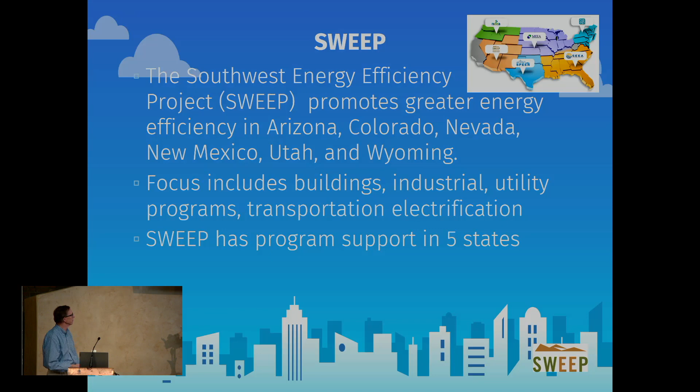So those are the codes. What's interesting now is the NEC. I never had any discussions about the NEC all the years that I was working on codes, until the last few years, because of all this discussion about decarbonization and electrification. Never had a discussion about the NEC—wasn't brought up in any of these conversations.

But now it's there because we're looking at the panel capacity loads, the electrical loads. We're looking at the NEC as—how archaic is the NEC? Does it recognize that we have all these LEDs and all these efficient appliances and so forth? So that's part of the conversation now. I know the front cover, that's about it, and I know a little bit about some panels. But that's now in the conversation about codes, and it wasn't before, other than with the electricians.

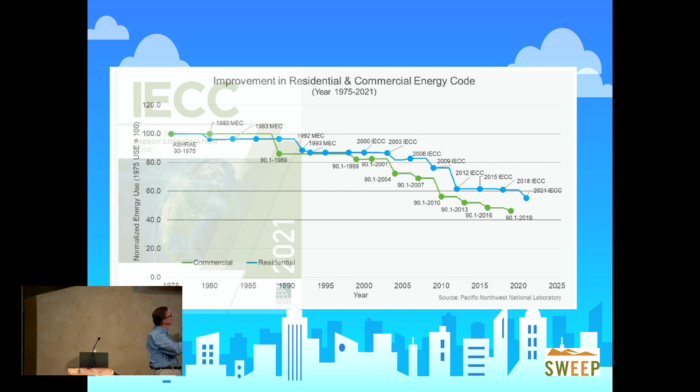So you can see green is commercial, that's ASHRAE, and blue is residential, the IECC, International Energy Conservation Code. We got stuck from the 2012 to the 2018, and now we saw about a 10% increase to the 2021. I'm really going to focus on residential.

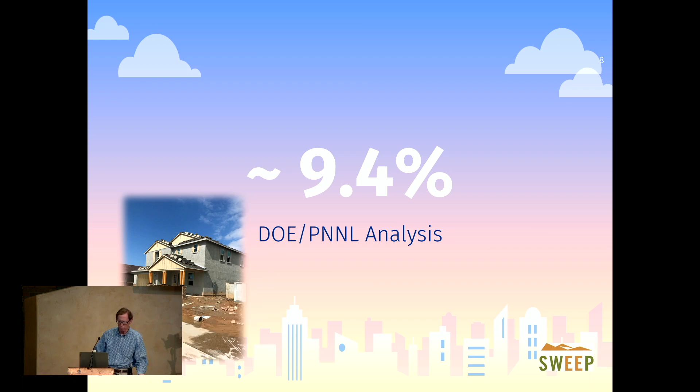There's not enough time to go into all the different commercial building types, and that conversation would be around the ASHRAE standard. I used to participate in the ASHRAE 90.1 committees years ago when I was working for an insulation trade association—so that was 13, 14 years ago.

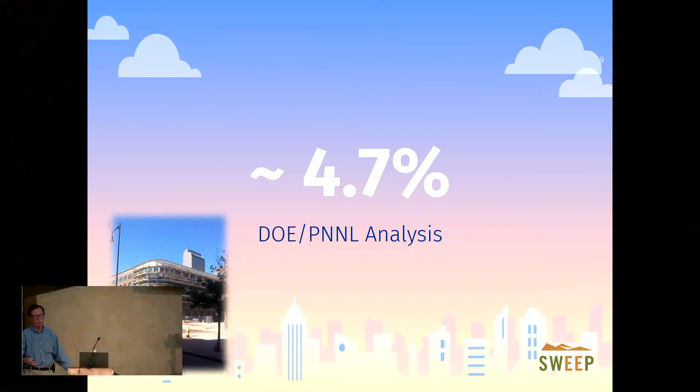9.4% savings with Department of Energy analysis for residential, commercial it's 4.7%, and this is from last year. There's a statutory requirement that they have to assess every time a code comes out—ASHRAE for commercial and the IECC for residential—whether there's energy savings from year to year. That came about from the 70s, when we had that big oil embargo and all the energy crisis and so forth of those days.

So complexity—this is the 2006, and I worked on the development of that. Look at how thick that is. Not very thick, and that's residential and commercial. This is residential and commercial today. The majority is commercial.

Residential is about that amount. Commercial is this. Much more complex, much more pathways for a designer, a builder, trades to build to the codes and standards, but much more complex areas that are in the code. Commissioning is in commercial codes. It wasn't in 2006. It wasn't there in 2003.

But if we're going to get to that corner of the graph, we're going to have to add some more complexity. Years ago, a fellow at the Pacific Northwest National Lab, Dave, said, let's just simplify everything and just come up with a number, MMBTU per square foot or kilowatt hours per square foot or something like that. I like that idea. Then we'd have guides like this thick on how to get there. But that would definitely simplify the code. Just have a number, and then you'd have to use software.

So I think we're still probably not till the 2030 timeframe when we'll start to see prescriptive move out of the code. But that's still there in California too. So codes and standards have been around for a long time. You've heard about King Hammurabi in Babylon, and he had his, if a builder builds and it falls and kills the owner, then they're put to death.

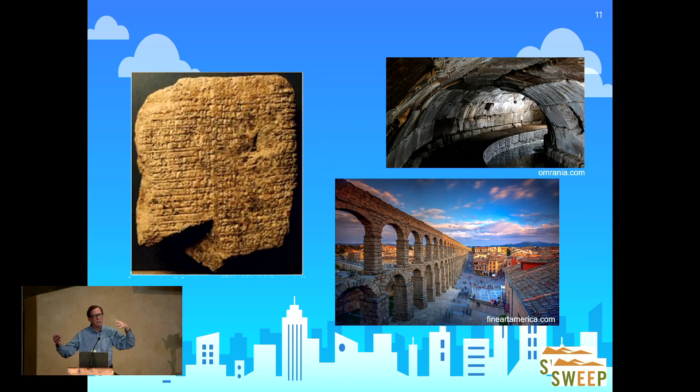And then, of course, in Rome, they had all kinds of requirements around their water requirements. And they also had requirements on their buildings so that they wouldn't tumble over. So they started at 70 feet, they moved them down to 60 feet. They weren't into the energy efficiency that we're talking tonight, but codes and standards of some level have been around for a long time. And of course, the Chicago fire and San Francisco and on and on. And the insurance industry saw the value of codes and standards too.

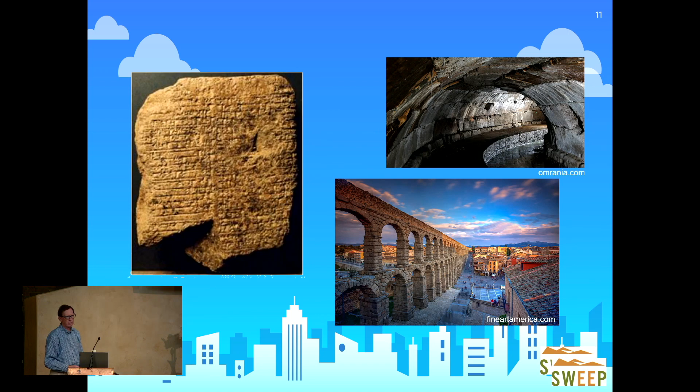So I tend to call it progress, not perfection. The code is not perfect by any means. It's developed by humans, and it's developed by building officials and product manufacturers and efficiency advocates, a whole different mix. And so we're progressing to that goal, but it is not a perfect code. And so that's why the codes are developed as model codes so that you can amend them at a state level or at a municipal level.

And so I'm going to show you some of the things that are in the code today, the newest code, the 2021, and how that brings comfort and building science. So some of the complexity we talked about here, it's because there's been so much that we've learned about how buildings operate, how they perform. And that is filtering into the building codes, and it's filtering into the energy code.

There's pushback. There's certain industry that doesn't want it. They'd like to continue to build from the 2006 code if they could. But they're also recognizing that things are changing before them, especially around electrification, especially around EVs and so forth, that they are becoming more open to some of the policies. I'm not calling out names right now.

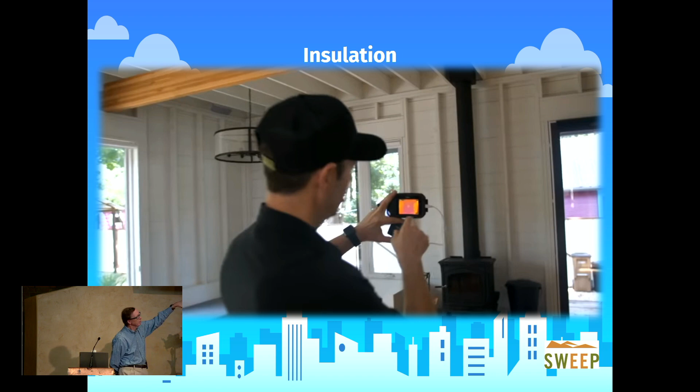So what do you see here in this wall? This is a wall. This is a house. It's in the northeast. It meets the code. What's going on? And that's a finished wall. What do you see? No, it's not. You can't see it. It looks almost like ship lap right up there. So what's happening? That's a code-built house in a cold climate. He is, but what's in the wall assembly? How do you think that wall is built?

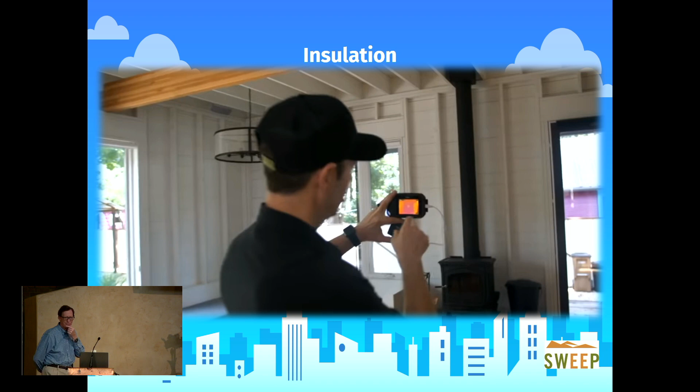Okay. It has insulation on the exterior. It's not SIPs, but it's insulation. Yeah, it's insulation on the outside because of the value of removing that thermal break in the wood. And so that's in the code today. Wasn't in the code years ago, but it's in the code, recognizing from a building science perspective that if you eliminate that thermal break, that building enclosure, that building shell is going to perform better. It's going to bring more comfort. And yes, so he's doing an IR scan on that house, showing that it looks good, but from the inside it doesn't, because all the insulation's to the outside.

So this is a table that gets caught up at municipalities, gets caught up at states for development. And I apologize, this was taken right out of the code, and you can view these codes for free on the ICC website.

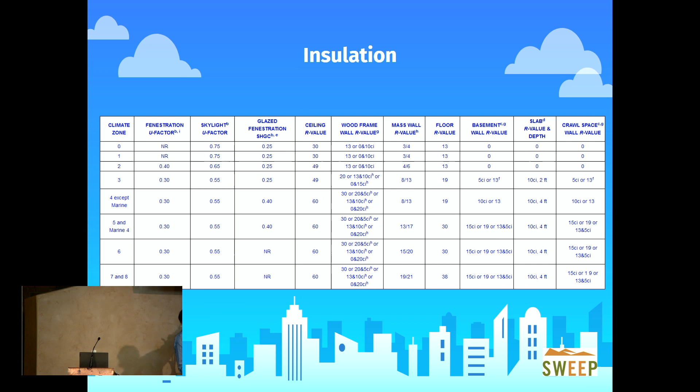And so here's where you see there's a 30 on the inside. At the very bottom, it's a 20 in the cavity, excuse me, 20 and then 5 continuous on the outside, or 13 in the cavity and 10, or nothing in the cavity and all the insulation of R20 is on the outside. So that's what it shows in this prescriptive table.

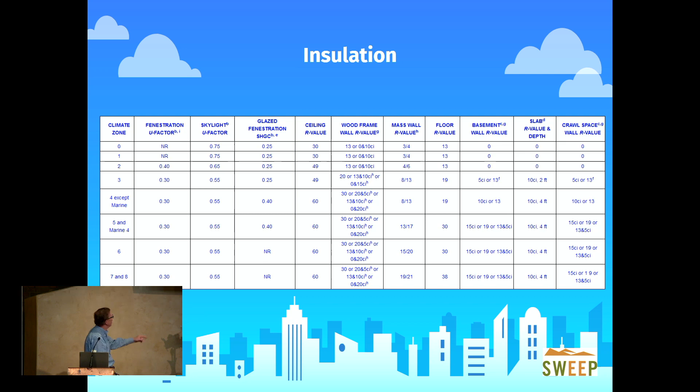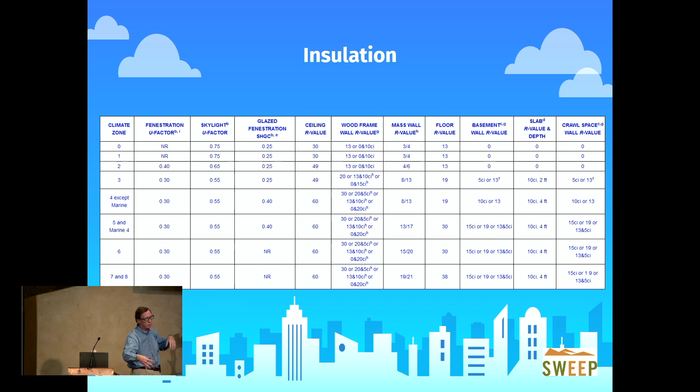And so you can see also that things have gotten much more insulation, not to passive house standards, but they're getting closer. You've got R60s in the attic in our climate, prescriptively, and I'll explain that performance. That's our baseline. And then even down in Phoenix, it's an R49 in the attic. And then the windows, fenestration is improving. I think they could drop them more, and we'll see them drop more in the 2024.

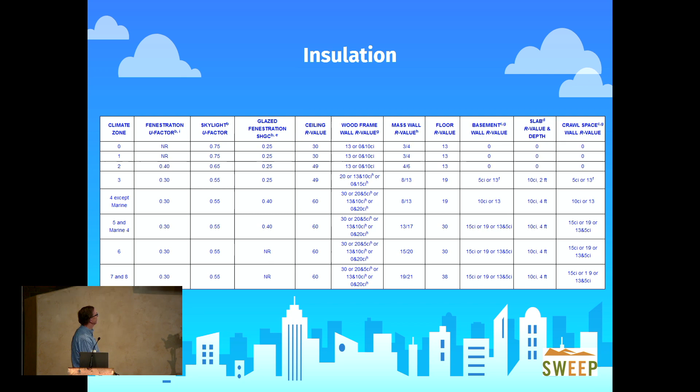And then especially the solar heat gain coefficient, they can go even further on that in the hot climates, Phoenix, Tucson, Las Vegas, those areas. And so we've improved the fenestration recently to a 0.3, so you're basically in an R3 window. Still, you can have better windows than that, but it is improving, and it's progress. It's not perfection.

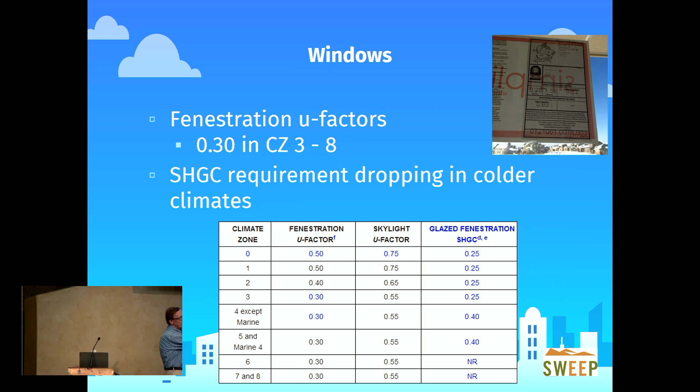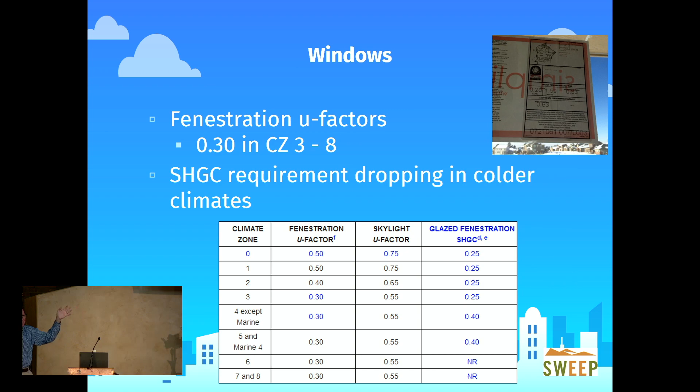So it is hard to see this picture. I took this about 9 years ago in a production house in Castle Rock. And the U factor is 0.28 in a production house about 9 years ago. And then the solar heat gain is 0.33. So these windows have been around for a long time. And production builders won't put in the most expensive windows. They want to get the best value for the product that they produce.

So the example of the NFRC, that's a good value. And again, we saw it years ago. The limitations that we have in our climate with a double pane, two panes of glass, is manufacturing here, and they use different types of gas within that window assembly, that IGU, and so most manufacturers are manufacturing outside of Colorado, and they have to bring them in. And so when you're coming in from a lower elevation to a higher elevation, it becomes a challenge.

So going to a triple pane can get us there. They're much heavier if it's all glass. They've got lightweight triple panes. They have R5 windows that have been around since the American Recovery and Reinvestment Act that was signed into law when President Obama was in back in 2010. That funded development for R5 windows, and there were manufacturers that were developing those products at that time. So we can continue to drive down the windows, and the cost really is no different.

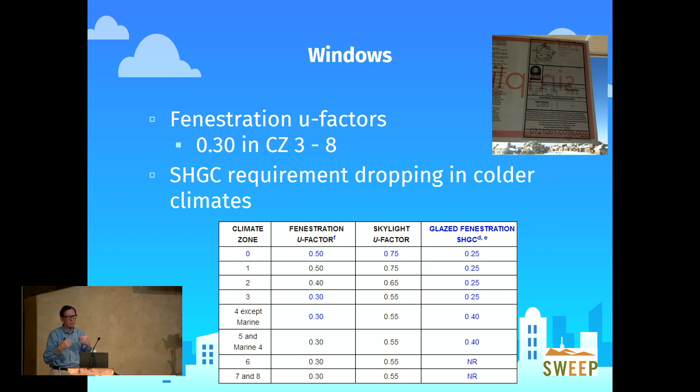Right, exactly. So years ago, you'd see more of a tinted window with these more efficient windows, but now the VT has gone up. So there's more light coming in, even though the solar heat gain coefficient may be low. And that's just those engineers and scientists that are working in that space, developing low E applications on glass. It's pretty cool what they're doing.

So for windows, here's where I was talking about recognizing, we didn't do that a few years back, the challenges of bringing in efficient windows into higher elevations. So now we do; there's some limitations. It's not as efficient, but there's known limitations until the industry can catch up and start producing those products that can keep the solar heat gain and the U factor down, and ship them into a higher elevation.

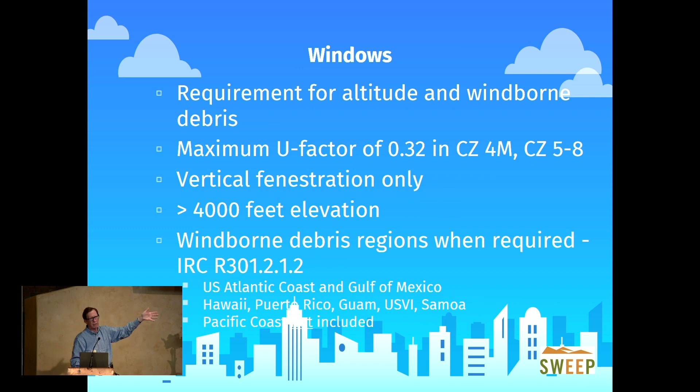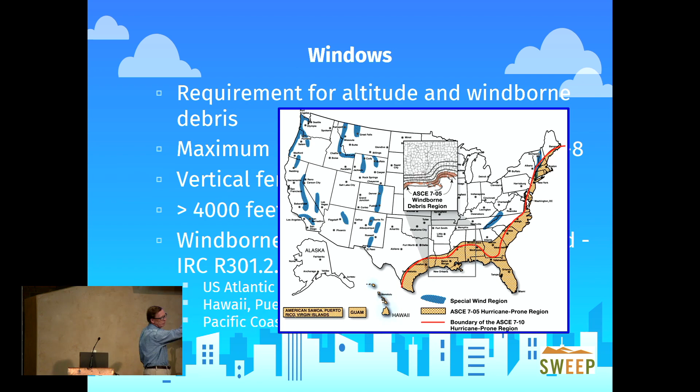And then also, there's this piece about windborne debris, recognizing that you go here along the southeast, the Gulf area, where you have hurricanes and sustained winds and so forth, that there's a different type of window application that can be applied in those spaces, and the window won't be as efficient in those areas because of that wind. And we have actually a little bit along our front range, some wind, but not to the level that's down in the hurricane-prone regions.

So this is one table that came into the code the year after this one. It came into the cycle after this one, 2009. You heard of the Energy Star thermal bypass checklist? That's basically what we've got here. And we go back and forth. In fact, we were probably 2 hours on this table today talking for the 2024 code. Where is it too much of a guide? Should it be more of a code?

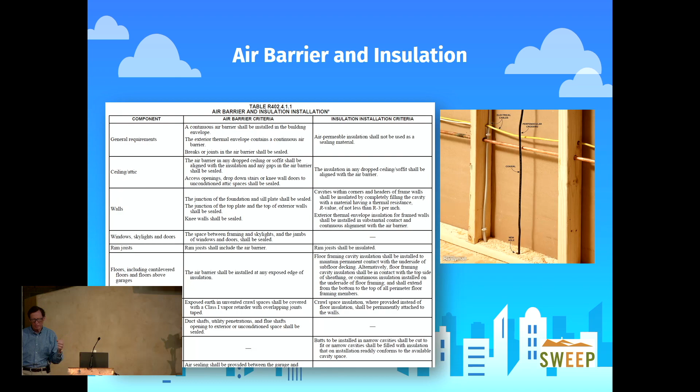But that was the whole idea here, is that we took the basics of the thermal bypass checklist and moved it into the code. Again, building science coming into the code, so that we're not building these buildings and then having issues with mold, well, mostly mold, or any other resiliency impacts to the longevity of that building.

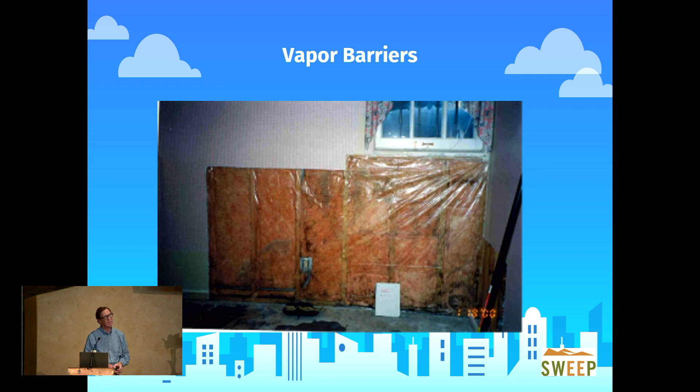And years ago, homes that were built in the 70s with no insulation, the wall assemblies could dry out. There was no insulation there. And now we're putting insulation in there. And now we're putting OSB, not plywood. And we're doing a number of other things; we didn't build houses that way in the 1970s or 60s. And so as the building materials have changed, the building science has changed too.

And as we're filling those cavities with insulation and air can't move through and can't dry as easily, vapor retarders, vapor barriers, depending upon your location, depending upon your climate zone, is it dry, is it humid, is it moist, will tell you where you should put your vapor retarder and what you could use. In our climate, we can get away with latex paint as a vapor retarder. So leakage is a big one.

And we have recognized that the code really just focused on single family. It didn't have a good take on multifamily or attached units. So you've got those common walls there that are not sealed up. Some are a wall assembly, a UL assembly. And so there's limitations on what you can do in those attached units, depending upon the materials you're using.

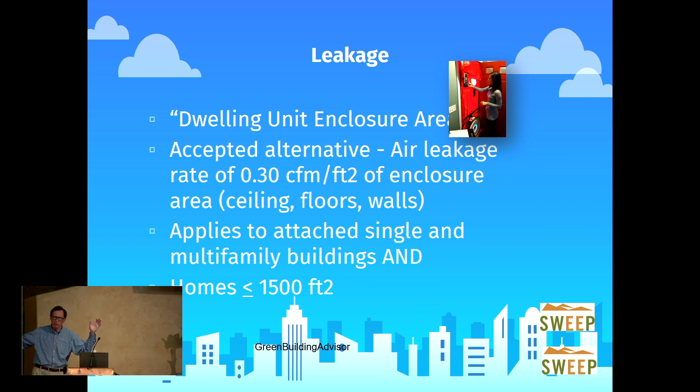And so now the code's come in: okay, if you've got an attached unit, if you have a smaller single family, 1,500 square feet or less, then you can test with the CFM, which is more accurate in the smaller units. You can't test that in the larger, though. The code doesn't allow you to do that. I see one day where it'll move to CFM. I mean, that's what you look at in weatherization. You're looking at your CFM. So all these buildings now can be tested and use that CFM calculation instead.

It's fairly close. That's a good question. So they had to look at it. It's not equal. It's somewhat equivalent. That would be, from what I understand, higher than 3 ACH. It is higher than 3 ACH, but it's not 5 ACH. It is higher, but it's close.

And the one thing about our codes is there's different pathways. You could build by a table, where you follow everything that's in the table. R this, R that, U that, SHGC this. And then there's pathways where you're going to use a service like an energy rater. And you're going to use software to calculate the energy of the reference house or the reference building per the code, and then how it's designed and expected to be built. And so those are other ways that take into consideration some other opportunities that you don't get prescriptively.

And then this is beneficial again. 3 stories or less, I'm talking residential. 4 stories would be a commercial building. But this example right here is 3, and right along the side, I took that picture, there was a 4-story. And so that's residential and that's commercial. They probably, when they submitted their plans, submitted it all commercial, is my guess.

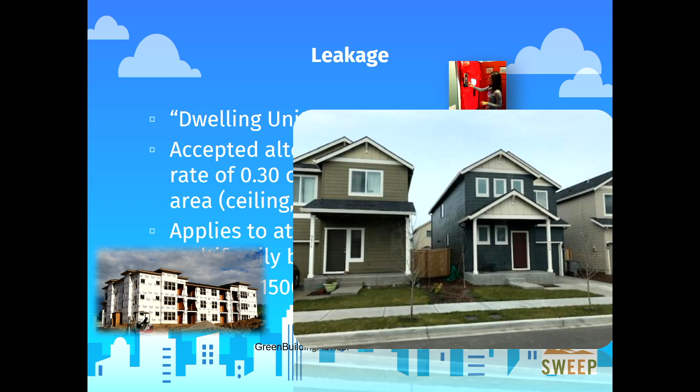Right. Good question. Okay. Good question at the end. But they're filtering into the code today.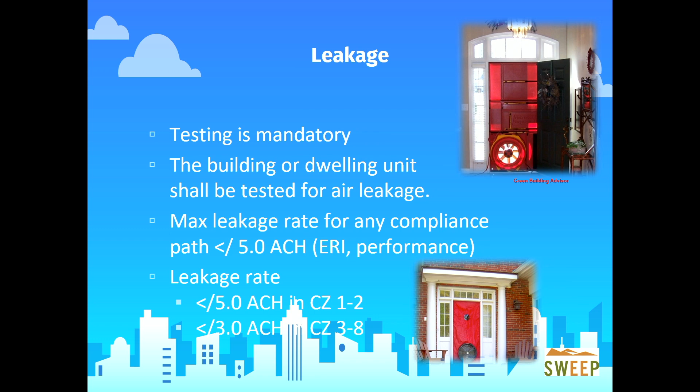Testing's mandatory, and per dwelling unit there's different requirements. If you choose a different pathway, there's a limitation. You used to be able to trade off to any leakage rate, but now you can only trade off to a certain level. You can't have it leakier than these levels. That's a new improvement in the building codes, and it's going to continue to bring comfort to the occupants of those buildings where they're not excessively leaky.

So duct testing, we've had duct testing in the code for many years. It started out just as prescriptive. The building inspector could visually look at the duct and say it was okay. Then it shifted to, if it's inside the building's conditioned space, you don't have to test it; if it's outside, you have to test it. And now, wherever it is, you have to test it—inside conditioned space or outside conditioned space. So recognizing that you still want the cool air or warm air to move and not have excessive leakage wherever that is, in a crawl space, in an attic, or whatever it may be.

Did you have a question? Okay, that's right, I'm not supposed to answer any questions. Sorry about that.

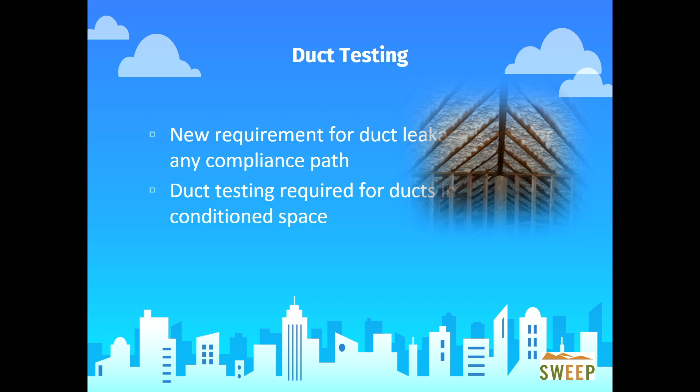So that's a new one. And we see in some of the climate areas that I work in, the ducts all reside in the attic. Arizona, they build on slabs. There's no place to put the ducts, no basement, so the ducts all go into the attic. Las Vegas, all the ducts go into the attic.

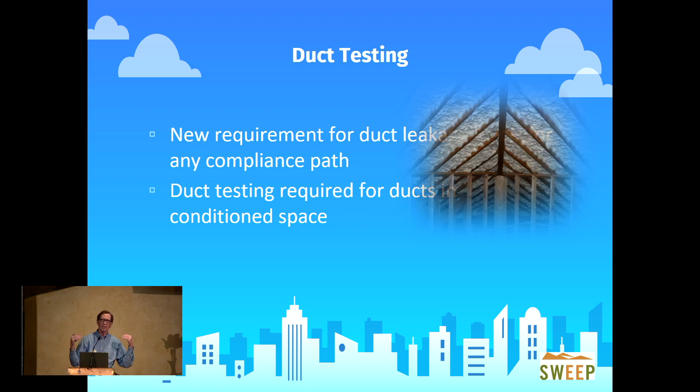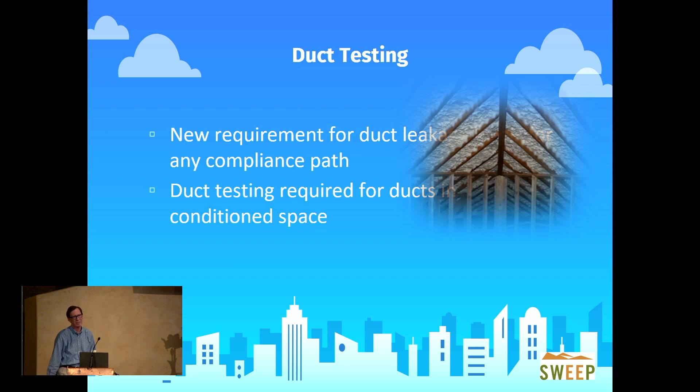So they've been taking their insulation and moving it up to the roof deck to create a semi-conditioned area, because as a semi-conditioned area, it qualified that it didn't have to be tested. Anything within did. But there, they stuck the HVAC equipment up there and the ducts up there, so they didn't have to test. Well, now they're having to test, which is good—you don't want a leaky system that you've not tested.

So duct insulation—I'm looking at my time, doing good—duct insulation in floor cavities, that's been an area where there's been complaints of comfort, where a living space over a garage has been very uncomfortable. Hot or cold depending on the time of year, and the garage was hot or cold, and the upstairs was the opposite. So what's happening now in this new code is, if you're going to put ducts in those floor areas or the garage, you're going to have to separate from the unconditioned space to the bottom of that duct an R19.

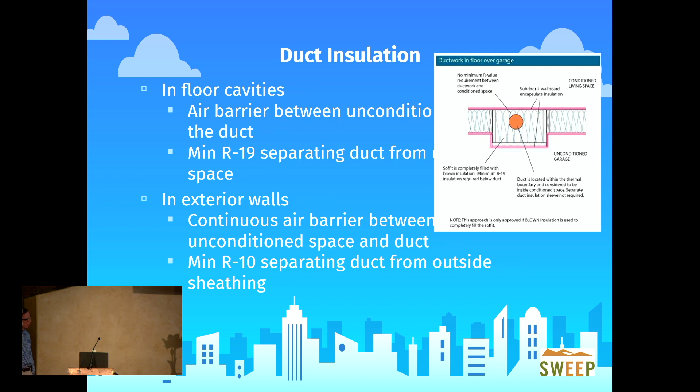In the floor, there's a diagram of it, showing how they fur it down. Back in, I don't remember, it was 2006, 2005, when I was an energy rater and the director at E-Star Colorado, builders were framing it down then. So there were some builders already framing it down, recognizing that the duct wasn't sufficiently insulated. But for the most part, builders just throw it up there and fill it with insulation, but there's a minimum amount of insulation depending on how close it is to the drywall in the garage.

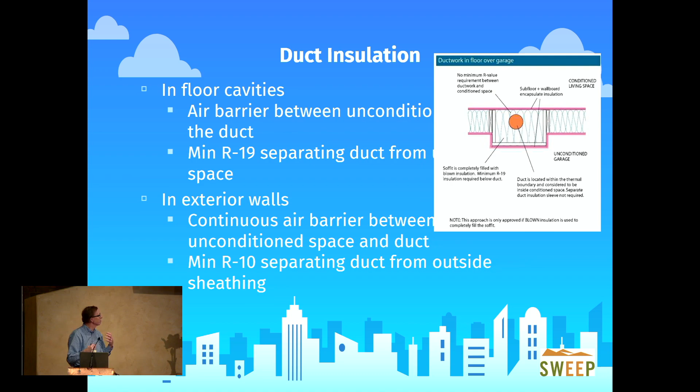And then also anything in the exterior wall has to be an R10 now, minimum. We've pushed hard for years to get the ducts out of the walls—run them inside chases, whatever, but get them outside of the walls, because you're not going to have much insulation there, and you're going to be heating and cooling that area. Now, that's typically gas forced air systems. As we move to heat pump systems, it could still be ducted, but it could also be cassettes throughout the home, so you don't have to worry about the ducts, and you wouldn't have to do the duct testing—that would go away.

I've been working down in Arizona with some communities to move to the 2021 code. The home builders don't like this testing - it's additional cost. They see it as $300-400 a house to do this kind of testing. Well, that might be true when they first start, but the cost will come down as those who do the testing, the energy raters, bring their costs down as more and more of this gets tested.

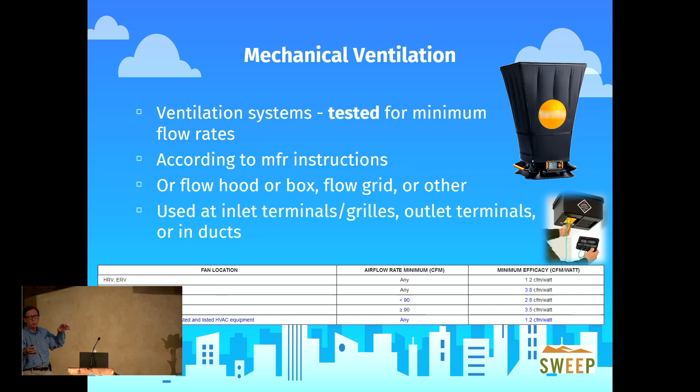But this is new too. Again, looking at these pieces that we've had in the code - but have they really worked? Have they really brought comfort? Have they really moved the moist air out of the home, out of the bathroom? And so this is now in the code. These pieces and parts were also in the Energy Star New Homes program, as those have filtered into the code.

ERV or HRV - energy recovery ventilation or heat recovery ventilation. What I understand talking to the industry is HRVs are on their way out as they're moving to ERVs. ERVs have been used in energy recovery ventilation - it's taking outside air and bringing it in, taking inside air and sending it out, and there's a way to mix it so you don't cross the air, but it's able to transfer the temperature between the inside air temperature and the outside air temperature. So it's tempered coming in is what you're looking at.

The ERV, energy recovery, is able to take care of the latent load, take care of that humidity, which we're blessed for not having that in our area. But you get down to Houston and you would want an ERV that could take care of that latent load and remove it, where an HRV, heat recovery, cannot. So what I'm hearing from the industry is HRVs are slowly moving away because an ERV does everything that an HRV does, but it also handles some moisture. And we can have moisture up in Aspen just as much as a Houston house, especially in the wintertime where it's all closed up - you're cooking, you've got many people in there, and there's a lot of humidity, and where's it going to go?

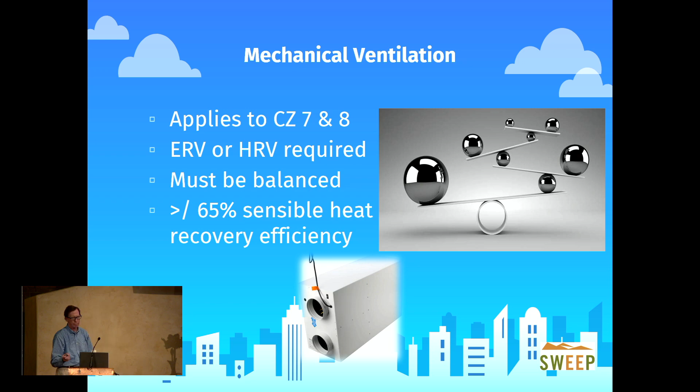Hot water efficiency - there were some proposals to bring in heat pumps as heat pump water heaters as a mandatory requirement, or at least one of the options. That didn't make it in. But compactness of hot water systems did.

So years ago, think of older homes built in the 70s and 60s - if you had a 2-story home, you could walk in and see where the bathroom is on the main level, and it's right above you on the second level. They didn't have bathrooms spread throughout houses like they've done in the 80s, 90s, and 2000s. So compactness of hot water systems - the idea is that you bring all of your fixtures where you have hot water close to one another, like they built homes 50 years ago.

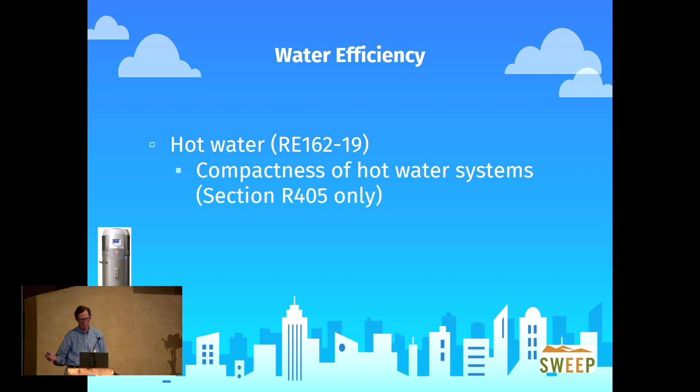And so that's a credit. That's on a performance path, but it's coming prescriptively. In one city I'm working with, Scottsdale, they're bringing that in prescriptively - it has to be designed so you're not running all this hot water, not wasting all this water going to a faucet that's going down a drain. So it's not a water efficiency measure, but it's looking at the energy it took to heat the water and then the loss of that heat going to the fixtures.

There are some options there where you can use a recirculation pump, an on-demand system. I have an on-demand, I love it, and that works great. So that's an option in the code.

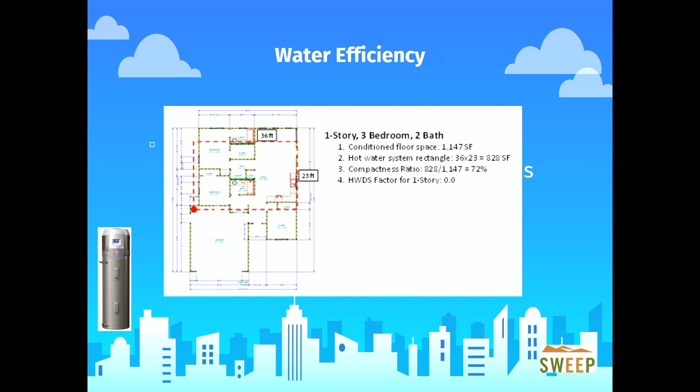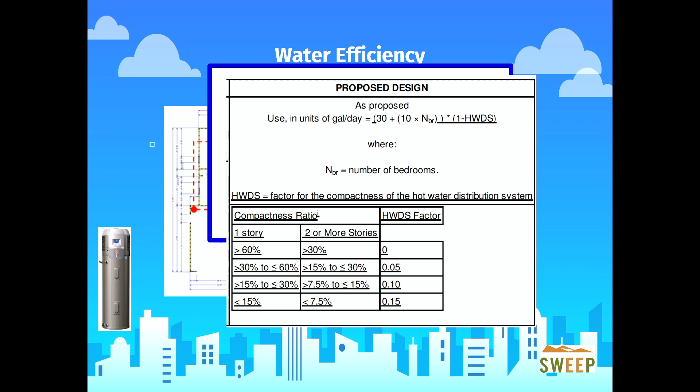So here you're just going to look at compacting where all your fixtures are. That has to be in the plans when submitted. This is another example of a drawing, and they've got a compactness ratio depending upon the size, and a hot water distribution factor, a system factor. So the larger the area, the larger the number, and that would be negative.

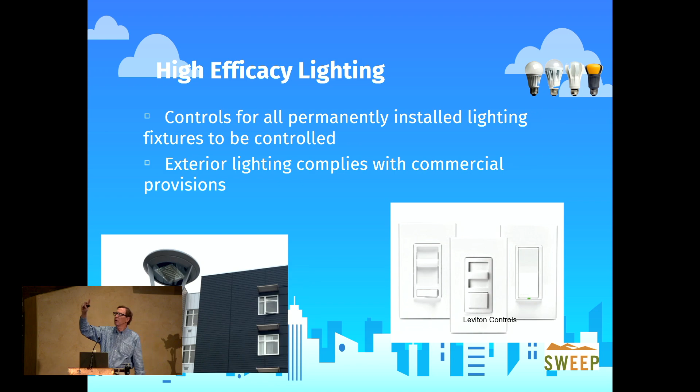What's interesting about the codes on the commercial side is the lighting requirements look at all of the building. So if you built this building new today, the code would be looking at the lighting inside, the lighting in the hall, and the exterior lighting on this building. But for residential, there have been no exterior lighting requirements.

Now new requirements have come in, but at a level where single-family homes and townhomes are not going to be impacted. But there are 3-story multifamily developments designed to the residential energy code that are now going to have to follow the commercial exterior building lighting requirements. So there's recognition that it's a commercial building, just 3 stories, and it was designed under the residential code where it didn't have those lighting requirements, so that's a benefit for the property owner and the tenants living there who pay those utility costs through their rent.

And then there are some new requirements within residential for occupancy switches. So in certain rooms you'd have an occupancy switch: you walk into the room, lights come on; you leave the room after a while, lights go off, like they already do in commercial. So there are energy savings opportunities there.

Now this is hard to see. There's a zero energy appendix for residential, and there's a zero carbon appendix. This is zero energy for residential, and there's a zero carbon appendix for the commercial buildings of the IECC.

The way it's broken down here, you have your climate zones. We reside in climate zone 5 here in Denver. It says your energy rating index - think of a HERS rating, or HERS rater, that's an ERI - has to be a 47 without any renewables. So that building has to hit that number, 47. Lower is better; 0 is zero energy.

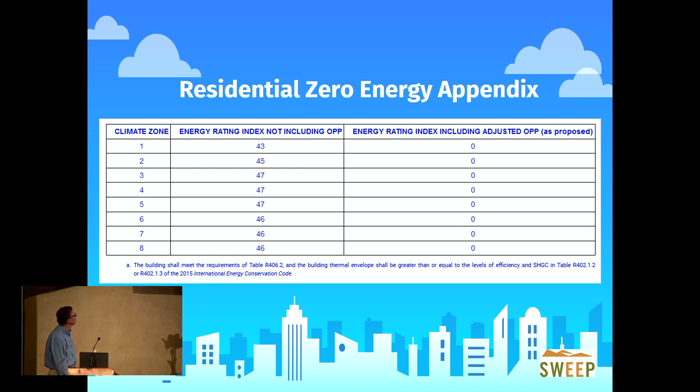So you go from 47, and if you implement this as a mandatory requirement, then your adjusted on-site power production gets you to a 0 on that score. That's the way it's written today. Some have looked at lowering this number on the left, and some have looked at raising this number a little bit, so it's a net 0, not zero energy. But this is the first take - the first time it came into the code, in 2021.

So there is some discussion about zero energy in the 2021 code, and indirectly with renewables. There's not specifics for renewables, except in the efficiency packages, which I'm going to talk about now.

So you build to the code, and then, oh by the way, you have to choose one of these efficiency packages. You build to the code prescriptively or use a software performance pathway, and then you have to pick an option here. There are many options.

It could be your heating equipment - it has furnaces, AC, heat pumps in there, air and ground source heat pumps. Those requirements have to be more efficient or equivalent to get credit. In some cases, builders are already putting in a 95% AFUE, those builders that are still building with gas - they're putting a 95%. So if I was a builder, I'd just choose that one, right? Doesn't cost me anything. But this is the first step; we see this improving and changing over time.

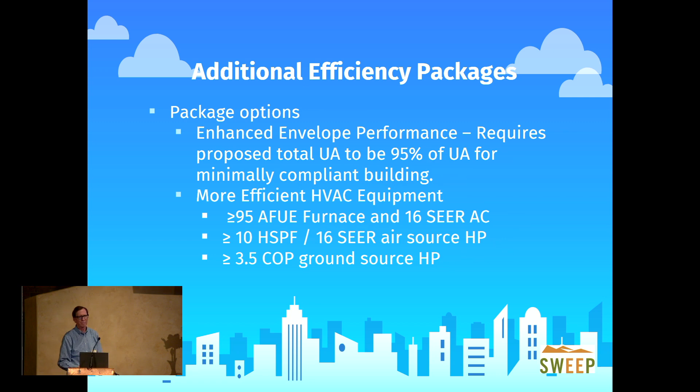Big leaps don't work in the code. It takes a while to get there.

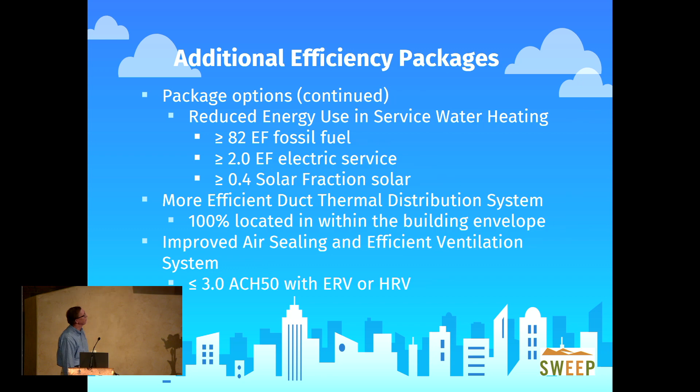And then service water heating - here's an option again where you can use your fossil fuel, your natural gas, you can use an EF for electrical, or you can use solar thermal. And then you can get credit if you go below 3 air changes per hour. That would apply to larger units, but you have to have an ERV or an HRV if you build to a tighter building enclosure. And again, that's going to bring comfort.

And then the simulated pathways where you're using software, 405, it's a section of the code that is basically a HERS rating. A HERS rater does that type of work. And they have to get, where it says 95% or less than or equal, they have to get 5% better than the base code. The software is going to make a calculation. This is where the base code, the reference home should be, and then this is where you need to be to exceed the code. And then 406 is the ERI pathway, so that's an index score like HERS.

That says 5% less. So if the score was 45, then it's going to have to be a 40.

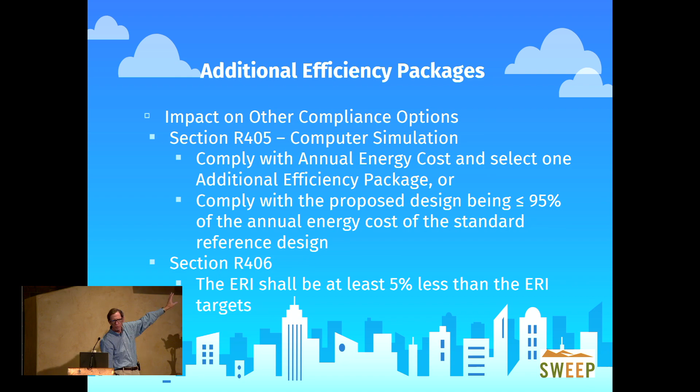So these are additional efficiency package options. This has been in the code for commercial for 3 cycles now, and it just made it in for residential. So that's where we're making progress. It's not perfect, we're making progress. So the commercial code brought it in, and now the residential code worked hard, and now it finally got in after the third version since the commercial code.

And then this is the energy rating index. This is just the base scores, and so these are in the 50s. So in our climate zone, it's a 55. If you did the ERI, it'd be 55 minus 5, so you'd have to come in with a 50 if you chose that. Well, no, actually, you have to choose that pathway with ERI.

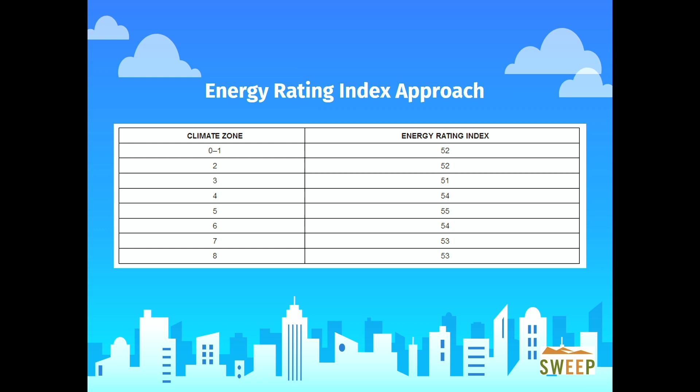So there's 4 pathways on the residential code. There are 90.1 on commercial, so there's 4 on the commercial side too for compliance.

So this is coming to the code, renewable energy certificates. And this is describing that. There's a definition, and this is because of those options we just talked about. I didn't dive too deep into it.

I actually voted against that. I voted, and you can ask me later why I voted against it. Well, I'll tell you why I voted against it. I don't think the building officials are the right person to look at the RECs and verify the REC is retired. Somebody else could, but I don't think it's the building code official. I don't disagree, I'm just saying I don't believe it's the building official's responsibility to do that. We need to find somebody else that can retire that REC.

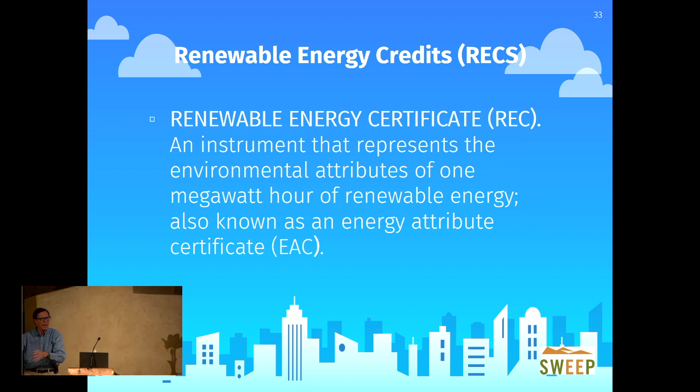So what's not included in the code, and I'm coming to the end, and we're right near the end. So what's missing? Electric vehicle infrastructure. We thought we got it into the 2021, it didn't make it, but there are proposals for the 2024 code. One for commercial, one for residential, and there's different, I call them gates, and both EV infrastructure for commercial and residential went through the first gate, which is good. You get through the first gate, you have a better chance of it making it into the code. If it misses that first gate, it could still get into the code, but it's much harder. But I think it's going to be there. And the home builders and the multifamily housing council is supportive if it's in an appendix, if it's not mandatory in the code. If it's in an appendix, they're saying they'll support it. They have their reasons. I think they probably won't support it. I don't know, because I've seen that before.

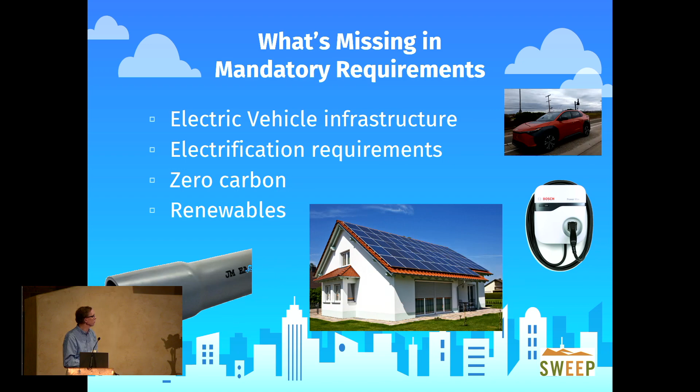Electrification requirements - just last week, we had a consensus committee meeting, and that got through the first gate. What that means is if you put natural gas, fossil fuels in, you also have to run electrical for your cooktop, your dryer, and your water heat. So you can still put in what we call a mixed fuel building, but you have to put in electrical too. So we'll see where that one goes - it just barely passed, but it made that first gate.

Talk more and more about zero carbon and zero energy coming up. And renewables are not in the code. And that's been an interesting discussion - those of us who have been supporting energy efficiency don't want to lose that energy efficiency. We don't want to allow it to be traded off. So we're saying we have to keep the level of efficiency we have, and then let's add renewables. But as I was in the insulation industry and the trade association, I recognize the job there is to help them sell more insulation. Well, the solar industry, the job there is to help them sell more solar systems.

Now, if you start to add renewable or storage and all those other pieces, then the equation's different. So it's going to come, but it's that progress. And it's that sometimes knocking heads. Yes, let's do this, let's not do that. So that's what I wanted to share. Thank you for your time.